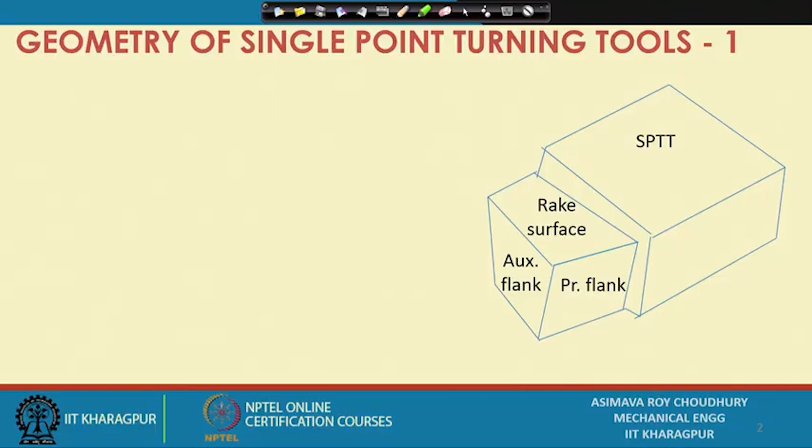Today we are going to discuss the geometry of the single point turning tool. On the screen you can see the shape of a single point turning tool, SPTT. This is considered the basic cutting tool or cutting element in machining. All cutting tools can ultimately be related to this single point turning tool, that is, all cutting tools can ultimately be shown to be composed of different single point turning tools or a modification of the single point turning tool.

So what do we see here? On the surface of the turning tool, first let us see the back portion of the turning tool. This is the shank or the base or the rear portion of the tool, which is held on the machine tool. If we hold it on the machine tool, it will be securely placed in position with rigidity.

On the front of the cutting tool we have three main surfaces or planes. These are called the rake surface, the auxiliary flank, and the principal flank. Flank means side, so these are the sides of the tool. This top surface of the tool is called the rake surface or face.

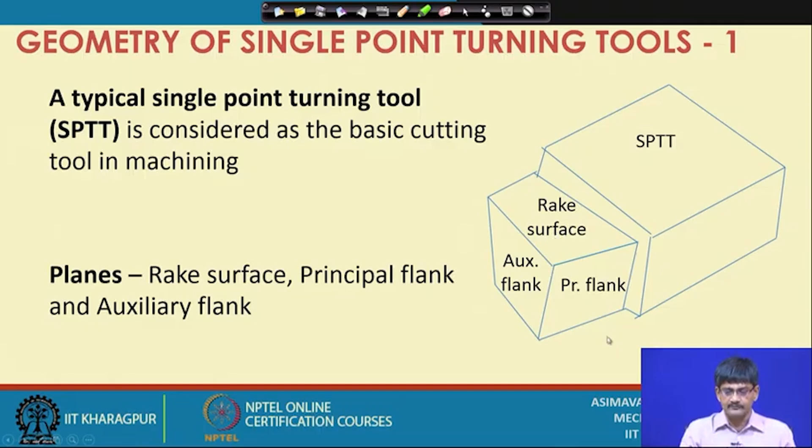The machine tool holds the tool-workpiece pair rigidly and provides relative motion between them. The tool that we saw just now is held on the machine tool. Examples of machine tools are lathe, milling machine, shaping machine, grinding machine, and drilling machine. Let us have a quick look at some of these machines.

For that, let us select the whiteboard. On the lathe, what kind of machines do we have? So on the lathe we have...

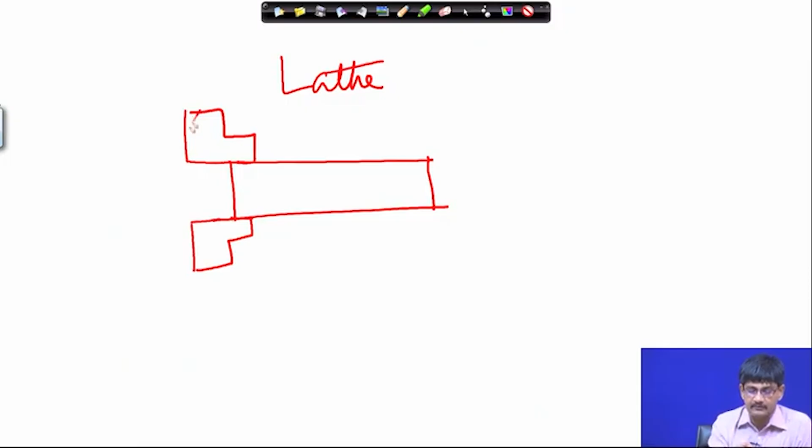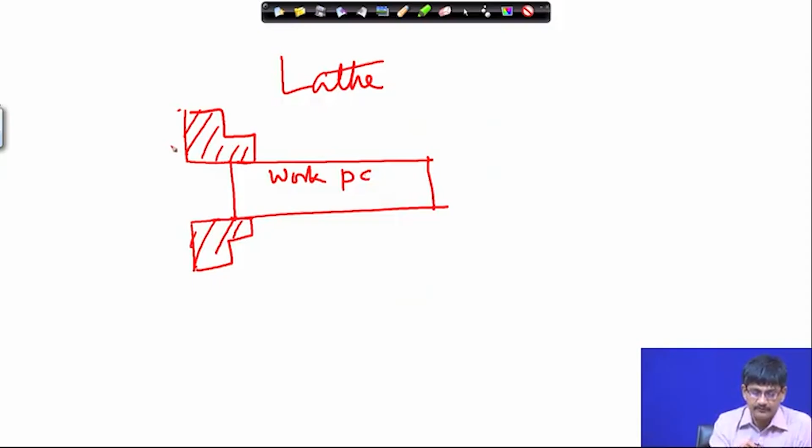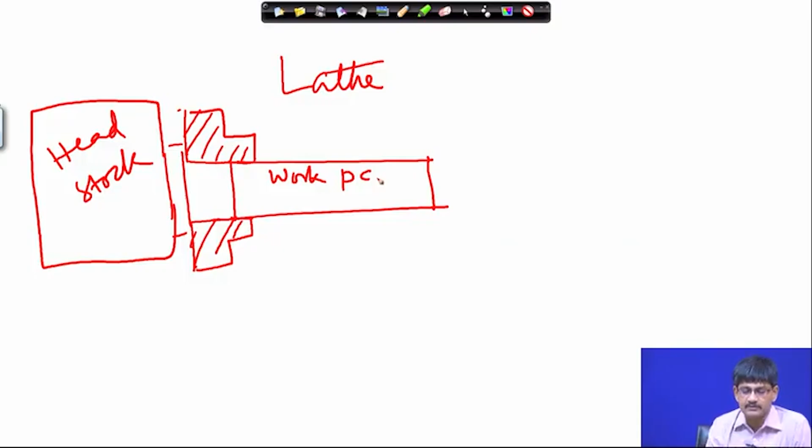We have the basic workpiece, held securely on a device called a chuck or center, which holds on to the workpiece. This one is made to rotate, and it has connection with something called the headstock. This headstock will typically contain gears which can change the speed of rotation of this workpiece. So on this workpiece, it may also be held on a center on this side.

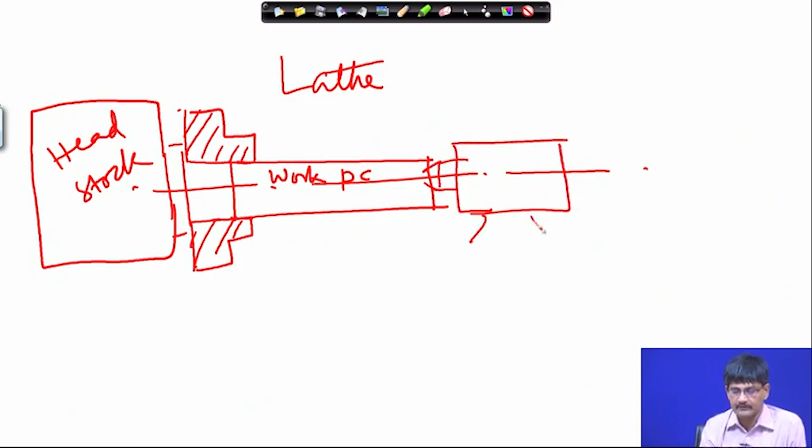We have the headstock, and just like that, we have the tailstock. And where is the tool? The tool is brought in. Let me draw it.

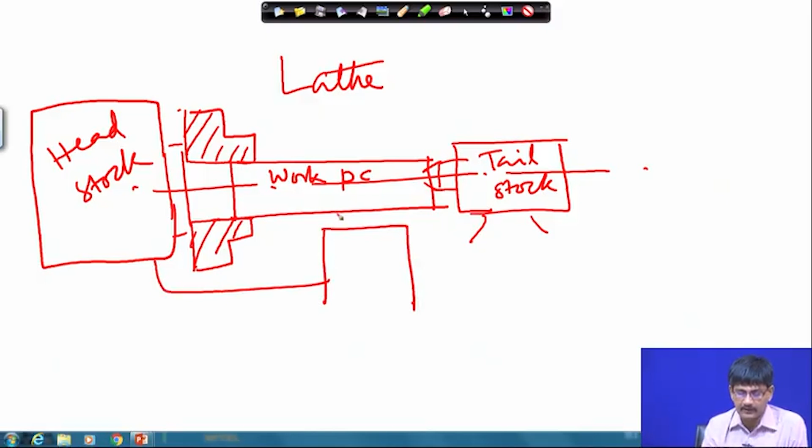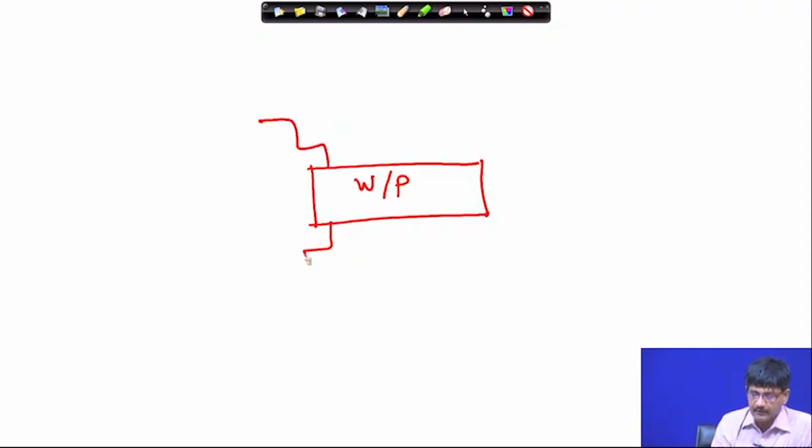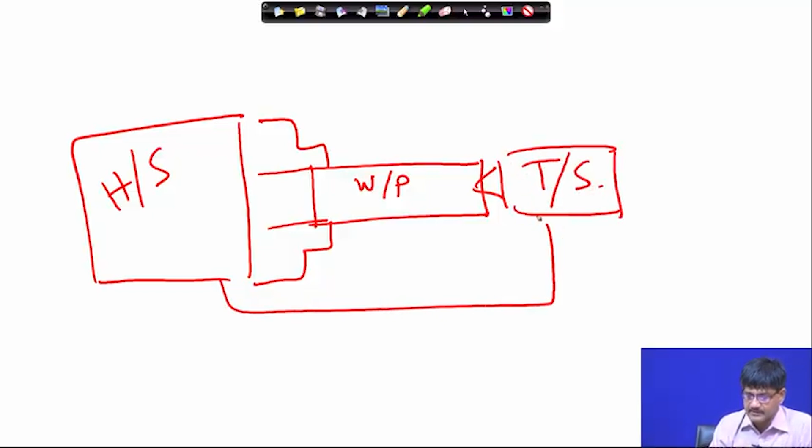I will just repeat those: the workpiece, the work holding device, the headstock, the tailstock, and the basic body of the machine, the lathe bed.

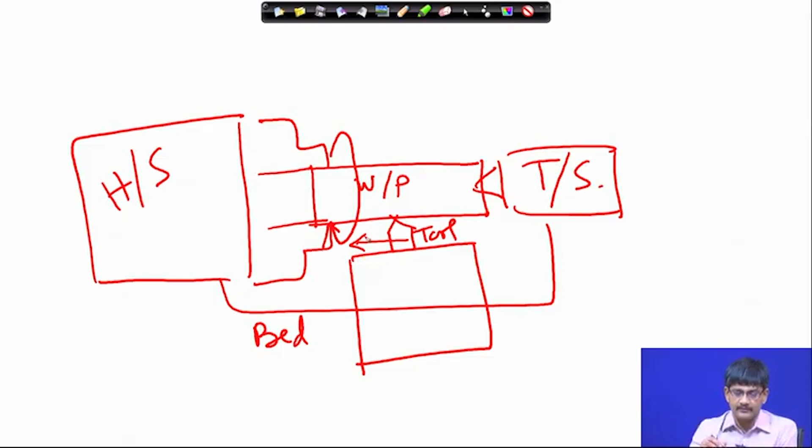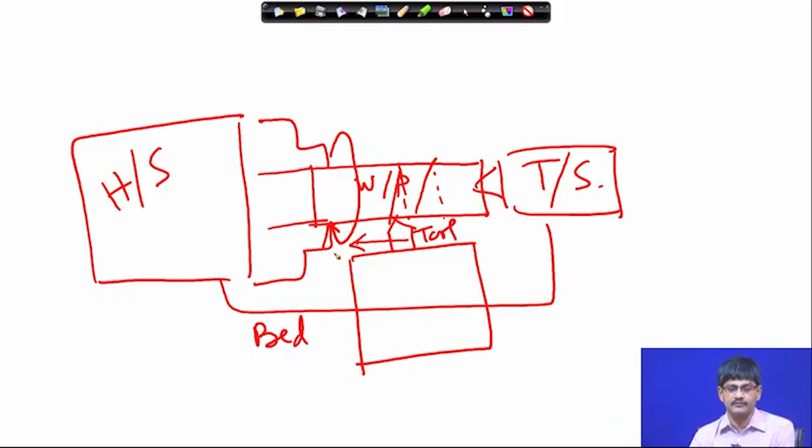On that there is a sort of saddle which can move this way and that way, and the tool is typically held on this saddle, or carriage. This is the lathe bed, and this is the tool. So, as I make the workpiece rotate and the tool moves this way, it primarily describes a helix, because rotation is combined with longitudinal motion, and we can make smaller cylinders with the help of this particular device.

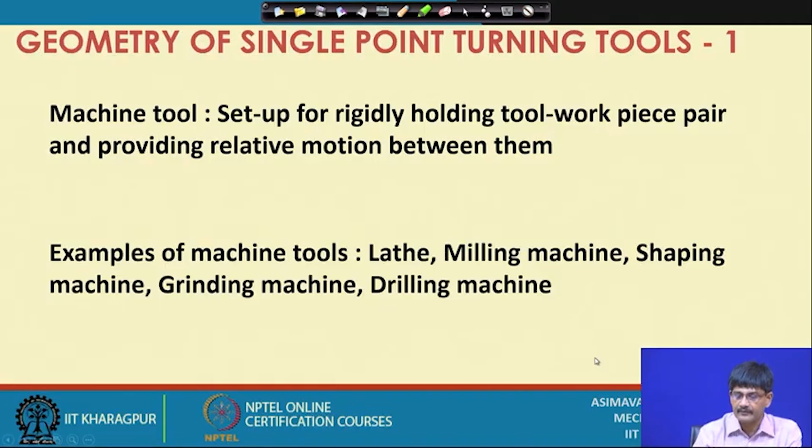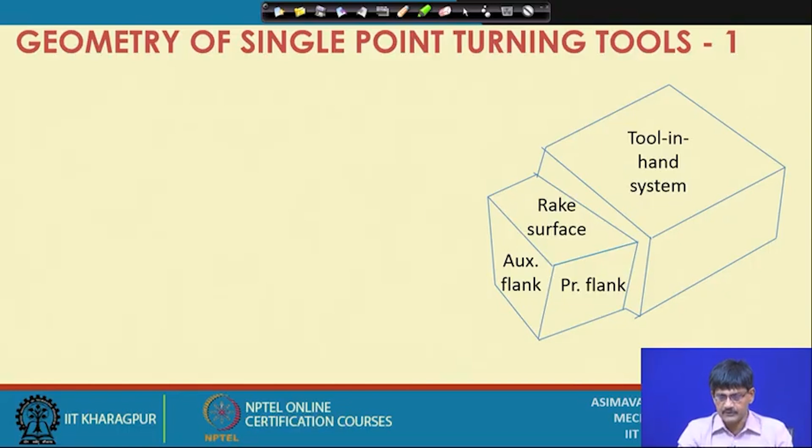Coming back to our tool now, the initial way in which we can refer to the tool is the tool in hand system. If we take the tool in our hand and move it this way, that way, there are some things which will not change. The rake surface will not change, the principal flank and the auxiliary flanks are not going to change. What is going to change is the angles which these planes make with different directions, for example the x, y, z directions. So in the tool in hand system, these are fixed - these are basically surfaces or planes.

What is the rake surface? The rake surface is that over which the chips flow. On the lathe it is placed in such a way that over the rake surface the chips will be flowing. This is the principal flank - it faces the unfinished part of the workpiece. And this is the auxiliary flank, which faces the finished part of the workpiece. So these are the definitions of these three planes.

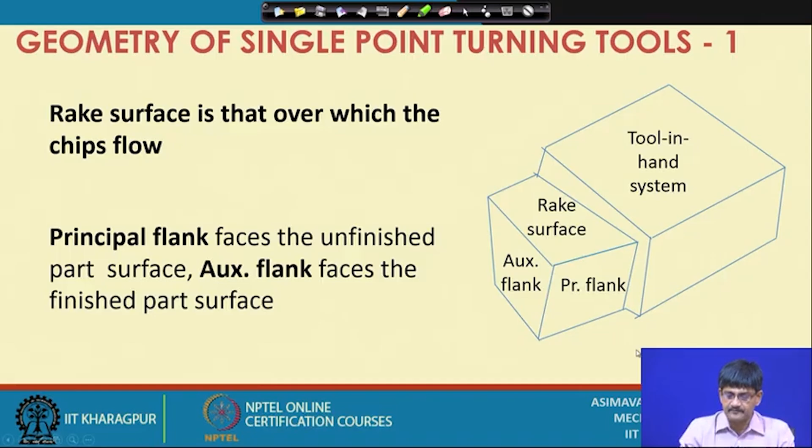So in the single point turning tool there are two cutting edges. One is the principal cutting edge and another is the auxiliary cutting edge. And when all these three planes meet, they define a point which is called the tool nose - this one is the tool nose.

So if we draw the tool with relation to the job, it would look somewhat like this. We are looking at the tool from the top. Therefore, this is the rake surface.

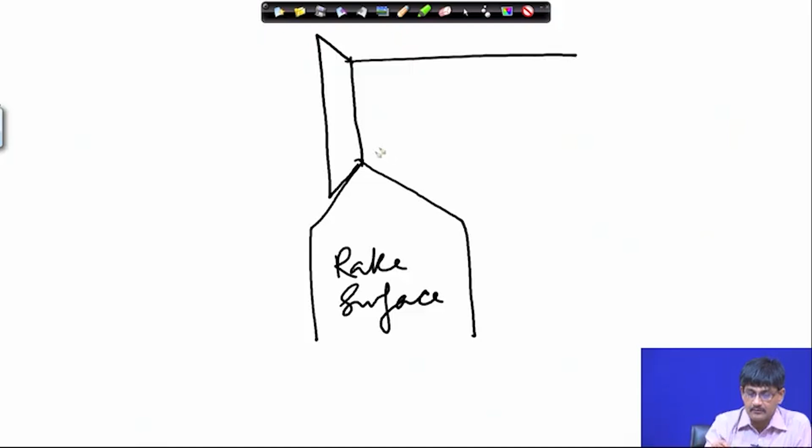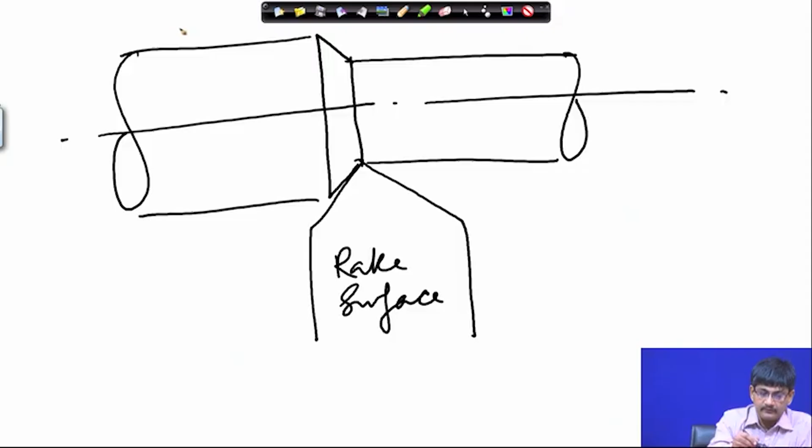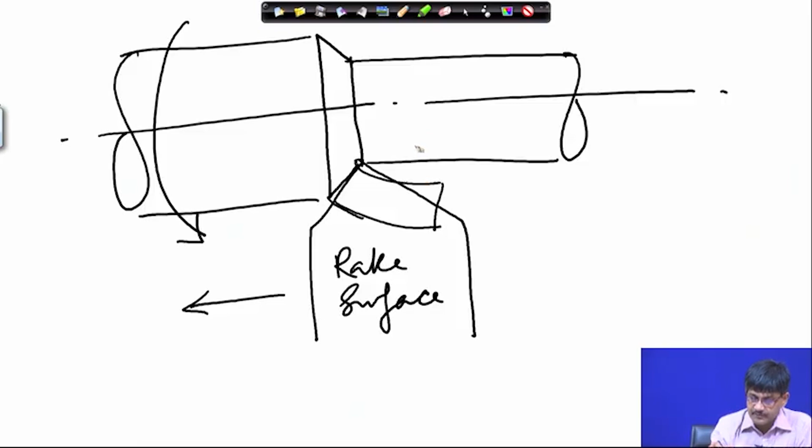Where is our job? The job is on this side. It is rotating. The tool is moving this way. So the chips are going to come out, as we saw the last day, the chips are going to come out here, over the rake surface, where the chips flow. And this is the finished part, this is the unfinished part.

So the principal flank is on this side. We cannot see it from the top, but it is there - it faces the unfinished part. The auxiliary flank, we cannot see it from here, but it faces the finished part of the workpiece. And we can draw dotted lines, of course. So this is the auxiliary flank which we cannot see from the top. And this is the principal flank - this one also we cannot see from the top, but it is facing the unfinished portion of the workpiece.

So this gives us those names, and as you can see, the principal cutting edge is this one. So it is in contact with the workpiece and is the main geometry element responsible for cutting of the metal.

Here also some cutting takes place, and this is the auxiliary cutting edge.

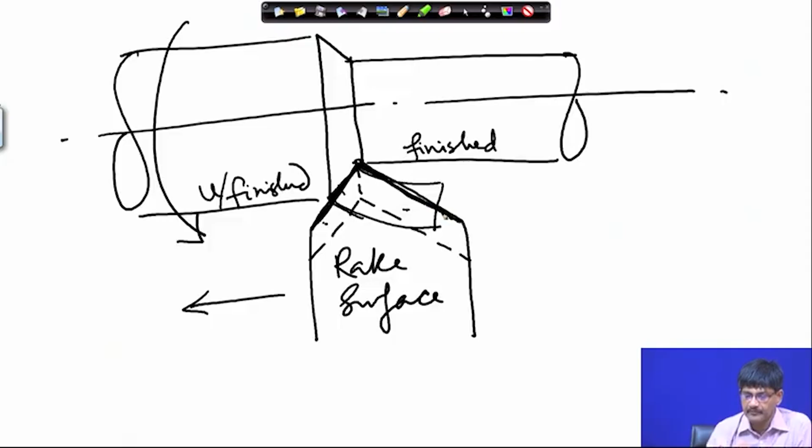So now let us move on to our next discussion. We have identified the rake surface, principal flank, auxiliary flank, and the two cutting edges in the tool in hand system. Now let us go on to...

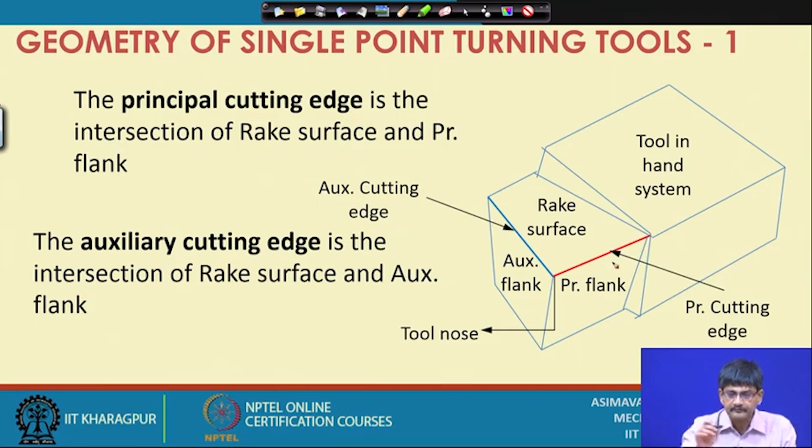...the tool when placed in a coordinate system, the machine coordinate system. Once the tool is placed in the machine coordinate system, it starts having a relationship with the different planes.

So this is our tool. What is this tool doing? The tool is having the three planes attached to it. These are the three directions: z axis, x axis, y axis.

What are these planes? These planes basically define the space in relation to a machine. For example, suppose this is fitted on a lathe. This will be the feed direction, the longitudinal feed direction. This will be the direction of the velocity vector, provided the tool is placed correctly, and this one is the transverse direction of the machine.

Just now, in the figure that we drew, you can easily find out these directions, and corresponding to these directions, if we combine them in pairs, we get planes. So the machine horizontal plane is the horizontal plane. It is basically the xy plane here.

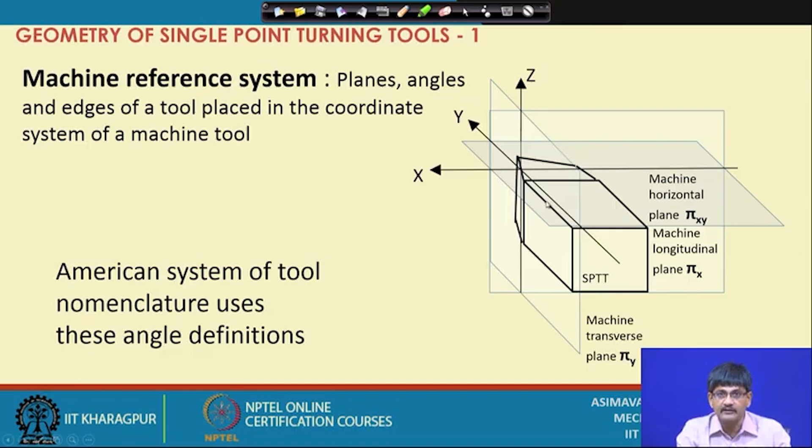So they will be cutting the tool along different planes and defining different angles. Let us see the angles which are created by the intersection of these planes with the tool.

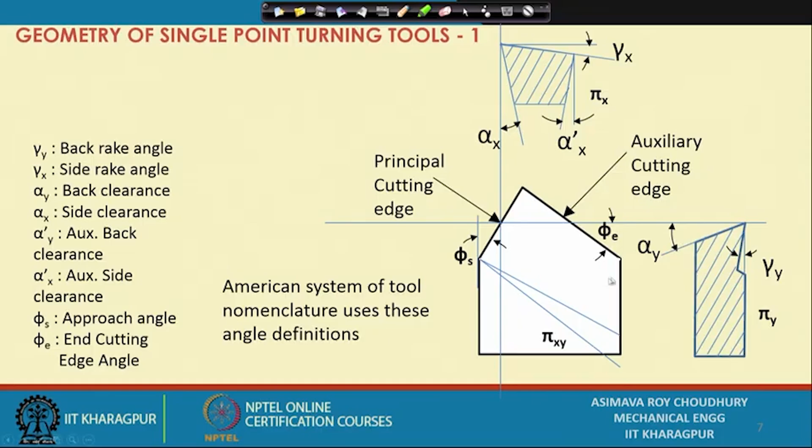First of all, I am seeing the tool here from the top. This is the tool from the top, and all angles, planes, edges, etc. are defined in this system of machine reference. It is called the machine reference system, and the American system of tool nomenclature uses these angle definitions.

For example, if you are cutting the tool along this particular line, if this is the xy plane, this is the projection in the xy plane, the plan view. If you cut it with this particular plane, what is this plane? This is the machine transverse plane, pi y. I cut it and I get a section of the tool, and I draw that section here.

When I am drawing this section, two angles appear and I name them gamma y and alpha y. You might say, what are these angles? I can formally define them, but let me give you a basic idea: they give the slant of the rake surface with reference to the pi xy plane, or the reference plane.

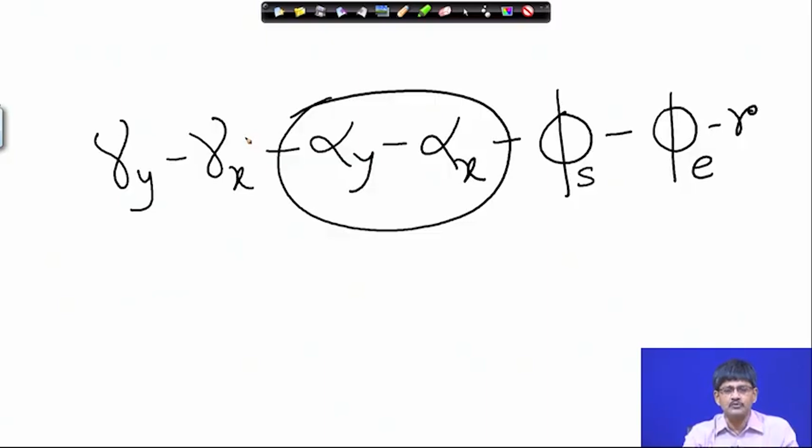Now, I would not like to follow this particular nomenclature, because there are certain problems with this. For example, there is no information about the auxiliary flank, and secondly, we might have problems if we use alpha y and alpha x together. We will know about these angles, but we will not accept this as a standard nomenclature for a cutting tool, because it might lead to problems. I will tell you what the problem is.

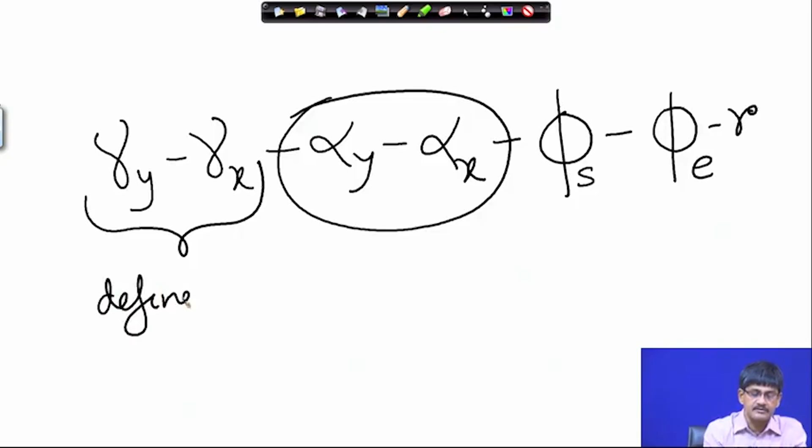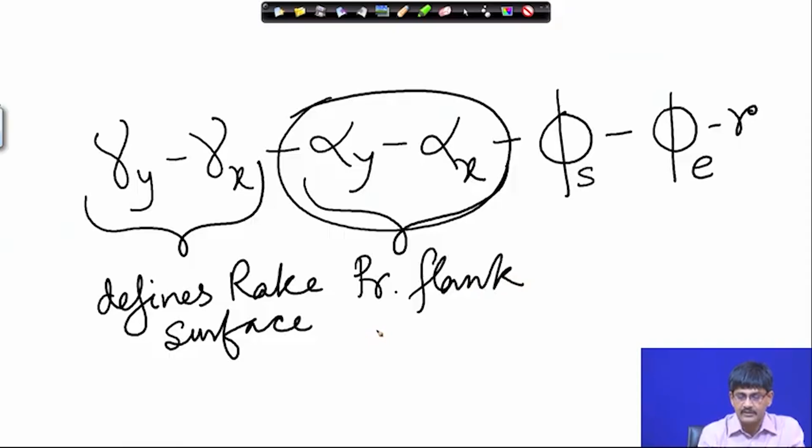If I define gamma y and gamma x, it defines the rake surface position in space, so the rake surface becomes invariant. If I define alpha y and alpha x, the principal flank becomes invariant, its orientation is fixed. So the orientation of the rake surface and the principal flank are both fixed, and therefore their intersection, which is the cutting edge, will also be fixed. You cannot have a free definition of the cutting edge after this. The cutting edge is fixed, which means phi s is also fixed.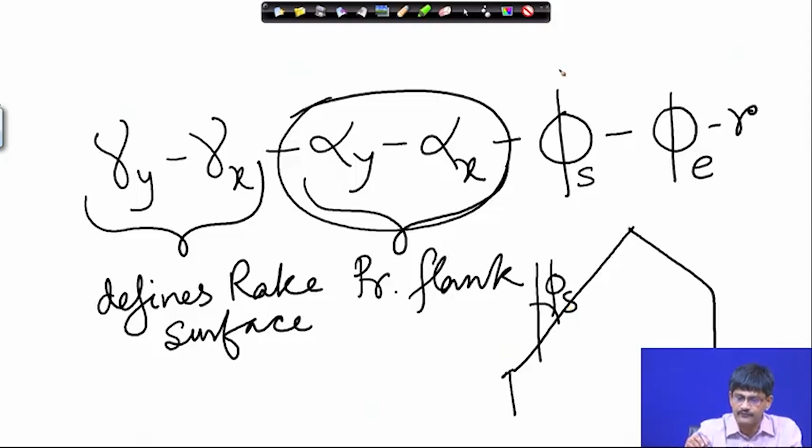Phi s is fixed after this, so we cannot freely define phi s. That is, if I take a tool with gamma y 15 degrees, gamma x 5 degrees, alpha y 10 degrees, alpha x 5 degrees, phi s say 25 degrees and phi e 65 degrees - no, phi s will be pre-decided. You cannot assign a particular value to phi s just like that once you have defined these 4 angles.

So though in many literature the nomenclature of the ASA system is given this way, we are not going to follow it. We will accept that the ASA system uses these angles, but we will not adopt this particular nomenclature for the tool in the ASA system.

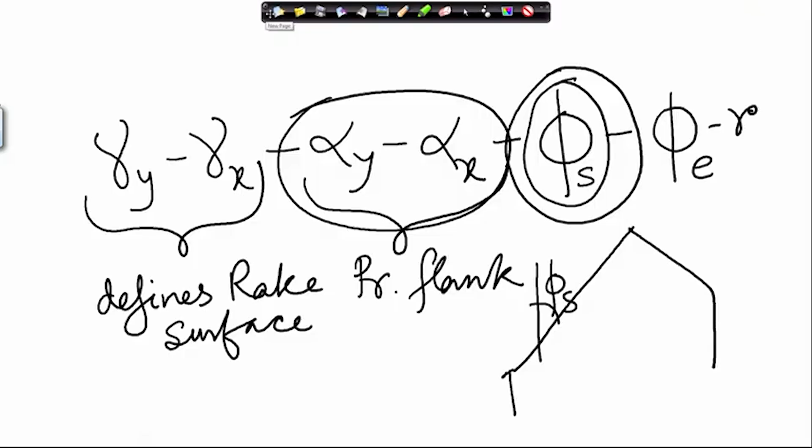This way all the angles can be defined. We are not going to go through all the definitions, but they can all be obtained this way: we take 2 planes, find the angle between them in another plane, and our basic definitions start from the velocity vector of cut. Let us have a look. Velocity vector, can it really change?

Suppose we are having this as the workpiece, and this as the tool. In that case, the velocity vector will be directed this way.

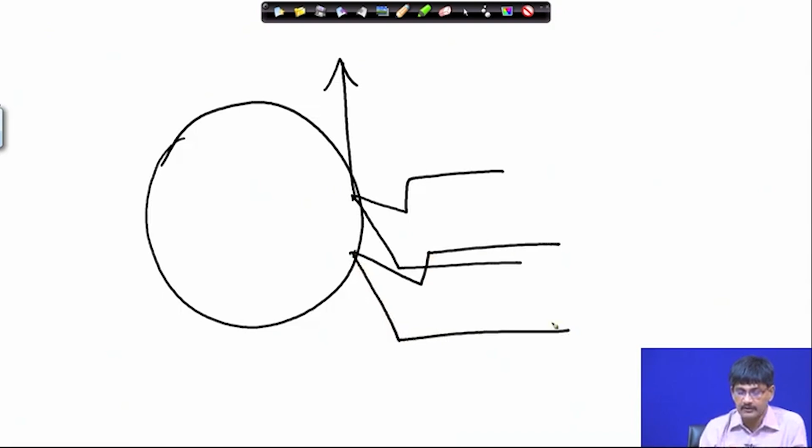Now suppose someone puts the tool by mistake at a lower height. In that case the velocity vector is this way, and all the tool angles will be changing because the reference plane is now here, whereas previously the reference plane was here. The reference plane, pi reference or pi r, is always perpendicular to the velocity vector. That is a problem, so we always start the definition of tool angles from the velocity vector of cut.

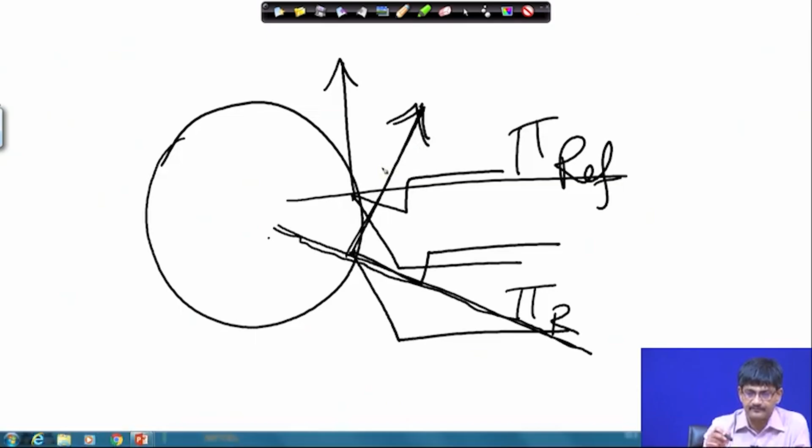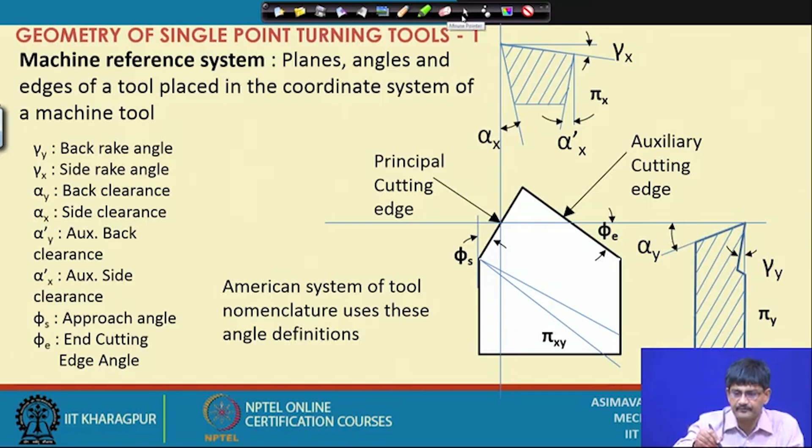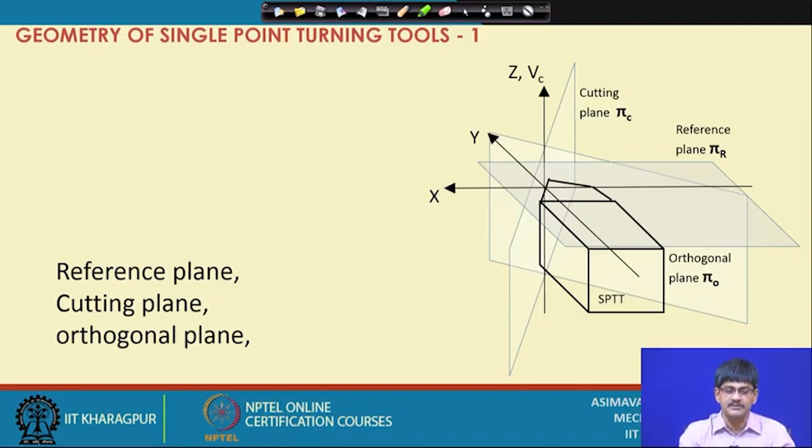So the American system is not the only system. There are other systems which have been formalized, and let us have a quick look at those. Another one is where the cutting edge forms the basis of the definition of the geometries, that means the angles and the edges etc. Whenever we have a cutting edge or cutting plane based system, we call it the orthogonal rake system. It basically defines a coordinate system where the planes are defined with relation to the cutting edge.

Here we have something called the cutting plane. What is the cutting plane? The cutting plane contains the cutting edge and also the velocity vector. The velocity vector of cut is here, and therefore this is the cutting plane.

What is the orthogonal plane? The orthogonal plane is perpendicular to the cutting plane and perpendicular to the reference plane. What is the reference plane? Just to remind you, the reference plane is perpendicular to the velocity vector. So this is the velocity vector, and if it happens to be along the z-axis, matters are simplified - this becomes the reference plane, pi xy plane only. The cutting plane contains the velocity vector and the cutting edge, and the orthogonal plane is perpendicular to the reference plane and perpendicular to the cutting plane.

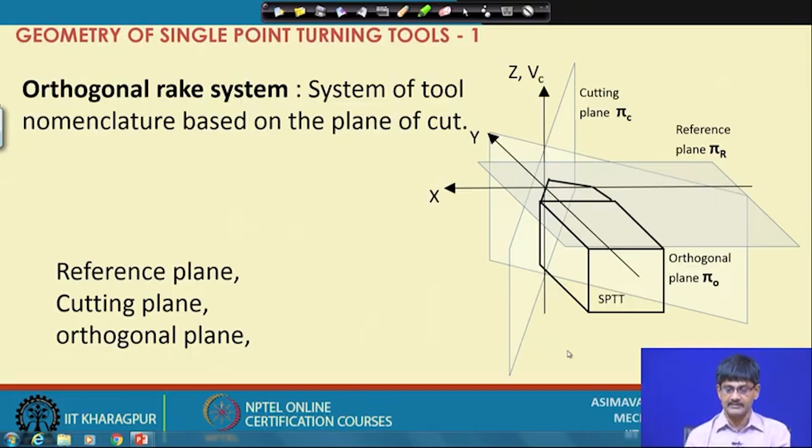So we have these definitions: reference plane, cutting plane, orthogonal plane. Let us see how the sections, I mean the angles, come out to be in that case.

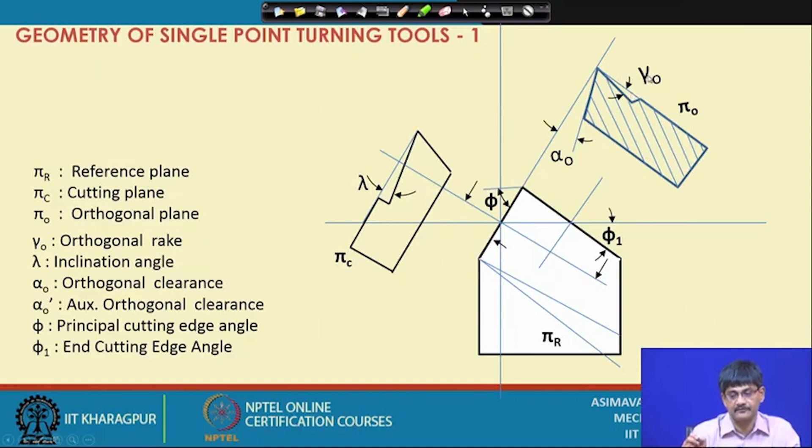In the same way, the same section will be producing a relation between the clearance angle - the relation between the principal flank and the cutting plane, measured in the orthogonal plane once again. So that is why this pi o has appeared here, and the two angles of cut are shown on the two sides: one is orthogonal rake and another is orthogonal clearance. So if you ask me, how is orthogonal clearance defined? It is defined between this plane, which is the principal flank, and that plane, which is the cutting plane, and the whole thing is measured or considered in the orthogonal plane.

That defines orthogonal clearance.

On this side, if we look at the tool, no section is required - we are simply looking at the tool and drawing a view, and we may see that the cutting edge is actually inclined. It's not straight. Here it's looking straight, but from the top, as it goes backwards, it might be inclined downwards or upwards, but it's basically having an incline. It's not moving horizontally here. This is reflected and captured in this view, inclined from the nose. So if it is inclined, this angle of inclination is given a name called lambda.

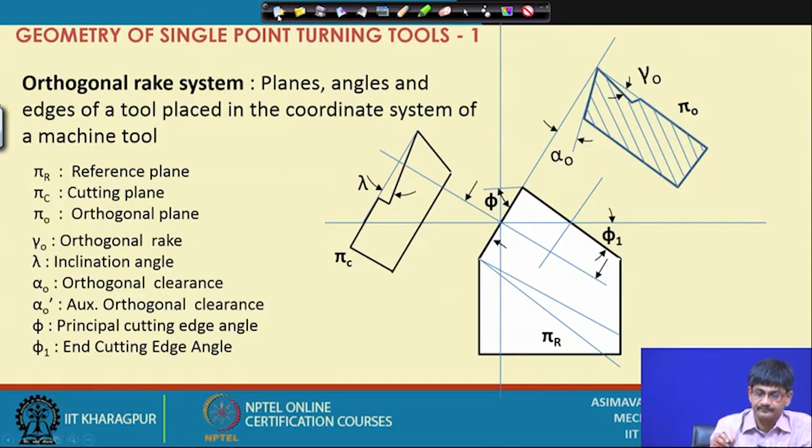How do we define them? Just like alpha O has been defined here, we have alpha O dash also, the auxiliary orthogonal clearance. How do we define this system? Let us have a look.

We can define it this way: lambda, gamma O, alpha O, alpha O dash, phi 1, phi, r. You might say, isn't the same problem that occurred in the ASA system going to occur here as well?

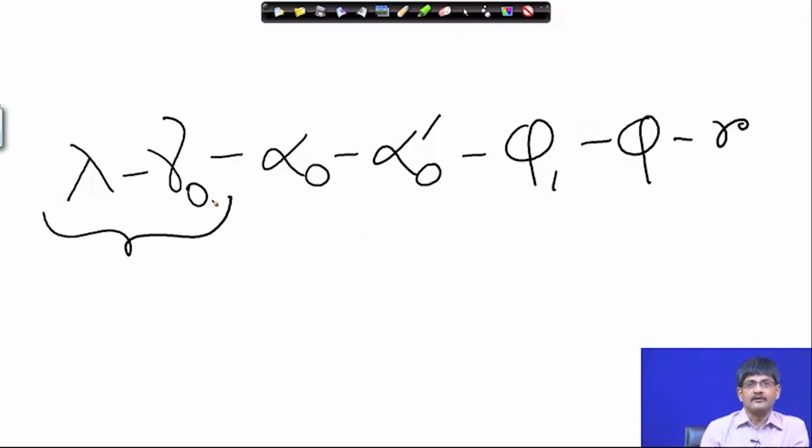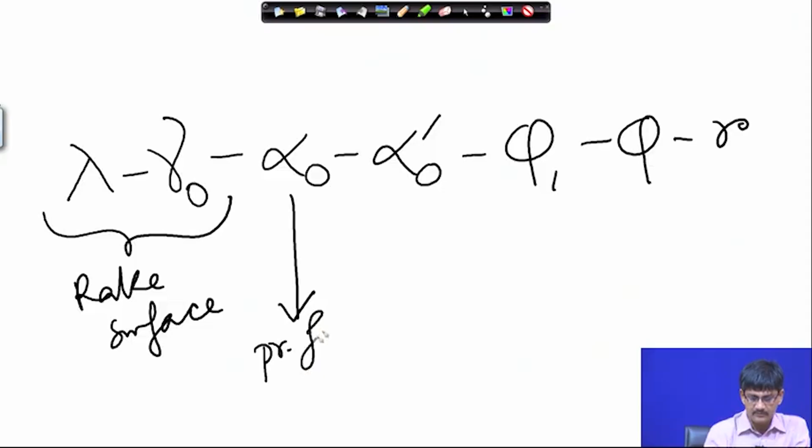No, because here we are defining the rake surface orientation by these two angles, and we are defining the principal flank by this one. You might say, can the principal flank be defined completely this way, with just a single angle? Well, some information is going to come from this one as well.

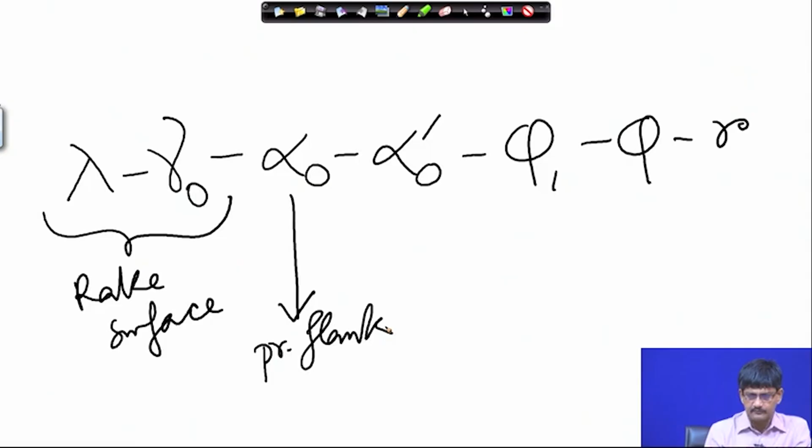For example, with these two I define the rake surface, and on that I define the principal cutting edge, using up this information. So this rake surface is oriented in space. On that I use up this information to draw the main cutting edge. From the main cutting edge, in this direction, I get the incline of the principal flank—I cannot see it from this side—by this angle. So I use this up also.

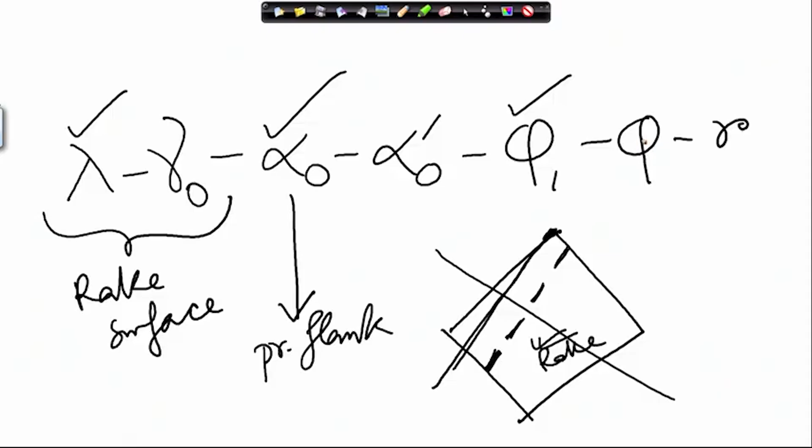Now I find out... I made a mistake, phi is used for getting the inclination. Just a moment, let me rub off some unnecessary lines. Phi is used up to define the principal cutting edge, and after that I define the inclination of the principal flank by alpha O, and therefore I define the principal flank as well. So principal flank is defined, rake surface is defined, principal cutting edge is defined.

After that, phi 1 helps me define the auxiliary cutting edge position. The rake surface is not just this square, but extended to infinity in all directions—it is an infinite plane. From there we are segmenting a small portion of it. So this is the auxiliary cutting edge, and in the same way we define the orientation of the auxiliary flank by using up this information.

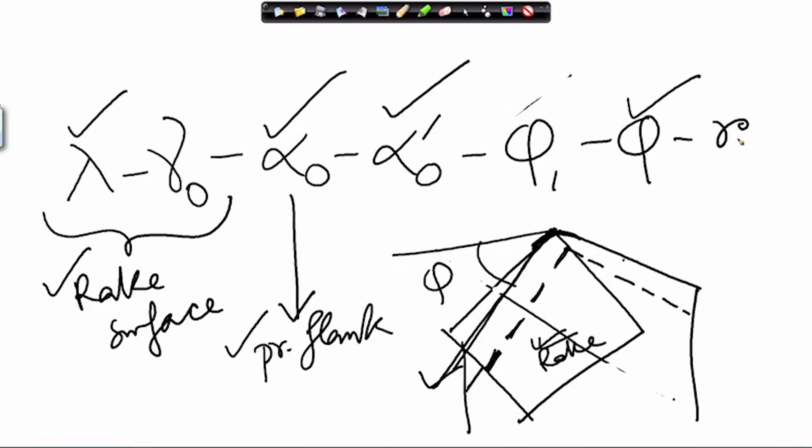Now that we have got this particular shape, the rounding of this point is defined by r. We have used all the information to get the complete picture, the three planes we had talked about, and hence this definition, this nomenclature of the orthogonal system, is all right.